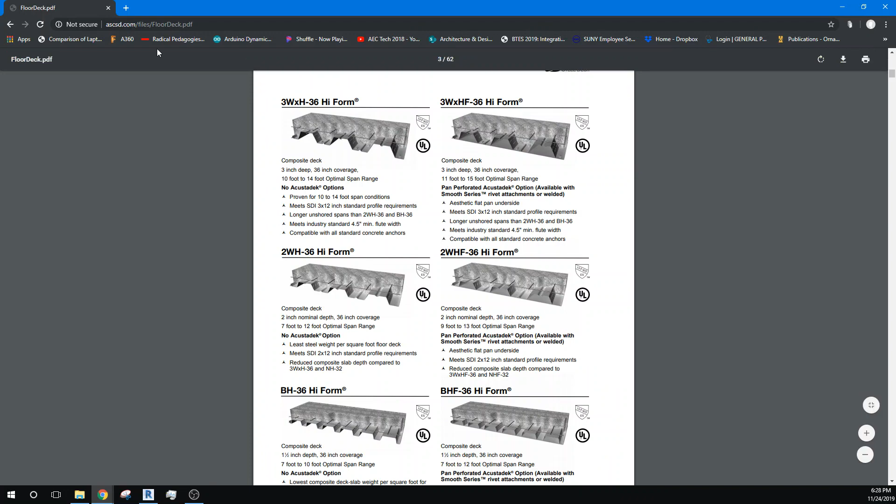I went ahead and looked these up. I Googled for composite floor deck and found a chart system. Here we have even a 2-inch depth floor system, spanning between a 7 and 12-foot range.

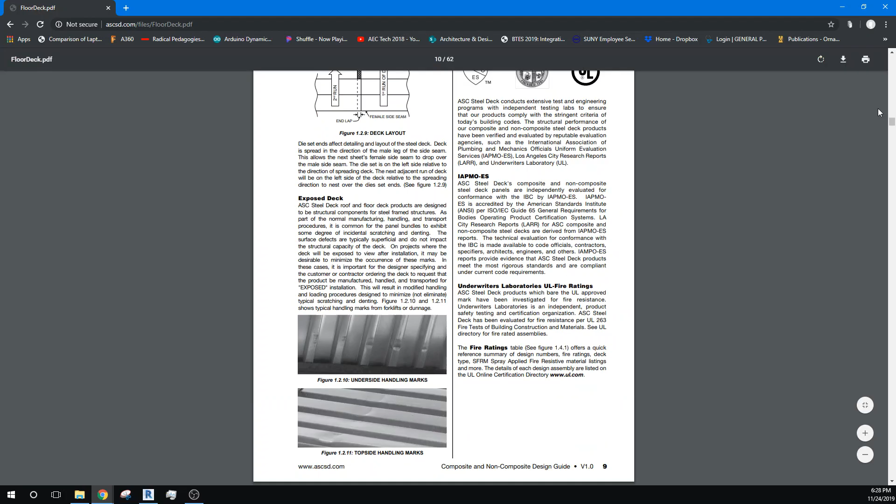Now these aren't the engineering tables, but they're just guidelines about where we can start. I don't know if they go all the way through, but if we go down through these charts we'll get to actual span tables.

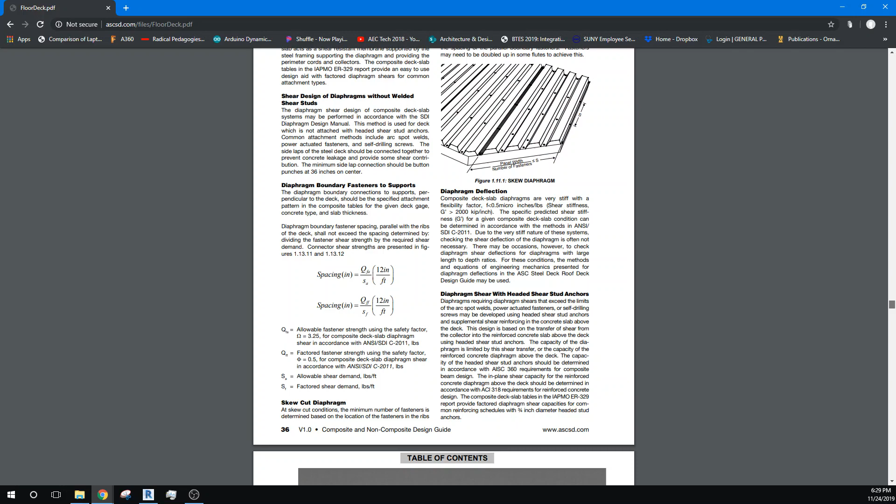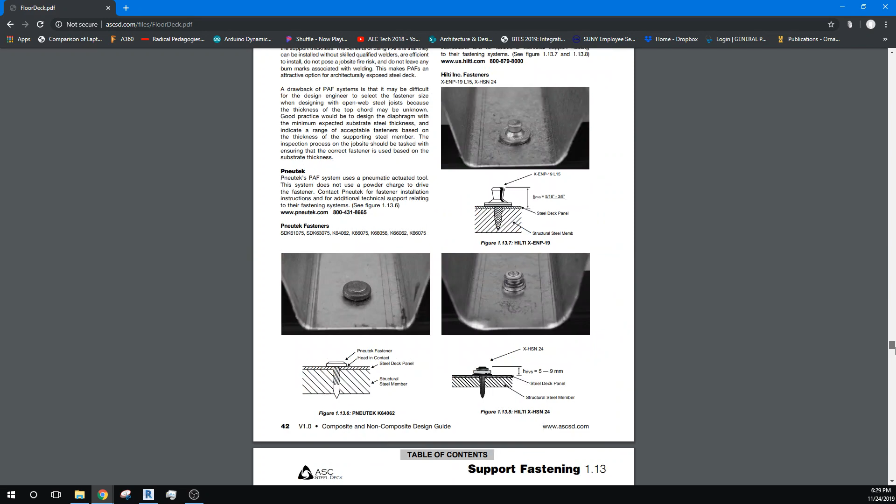They're full of technical descriptions about the relationships of spanning these composite deck systems, fastening them down, and getting data off the charts. Here you can see some fasteners which would fasten it down to the truss system, and then we get into details about the kind of beam systems. In this case they're using wide flanges.

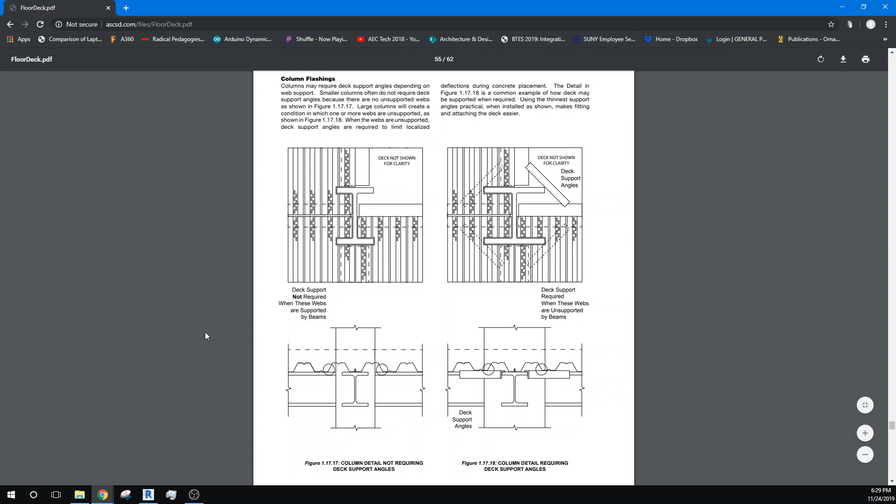And here they're starting to use truss systems. So enough of that—I'm just trying to introduce this idea that we really need to beef up this roof system over what we had originally designed.

I had set these 4 foot apart, but they really don't need to be—they'll span the 8 foot, no problem. So I'm going to go ahead and delete out some of these. Now we have that kind of an 8 foot span.

And I want to now put a roof system on there. We're going to define it as a floor system. It's not liking where we're starting with here, but I'll go to level 2.

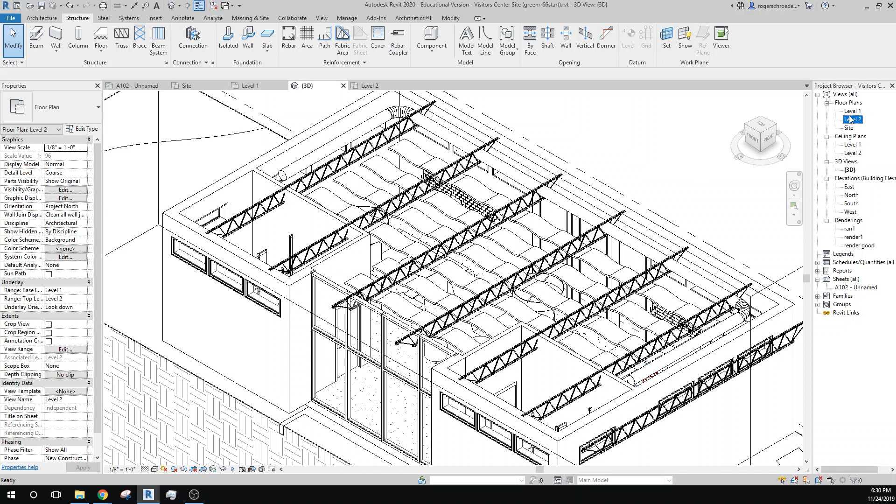If we were to put a floor structural system in, all we have in my document is insulated slab, and I really need another one. So I'm going to open up a new document. Just to tell you why I have such a limited selection—you may have the one in it already—I had purged out a lot of the extra elements when I was working on this document. I'm going to cancel that.

I'm going to go and open up a new file, a new project with the architectural template. All I'm doing is using this to grab a definition of a floor assembly. I'm going to go to structure, and then to floor.

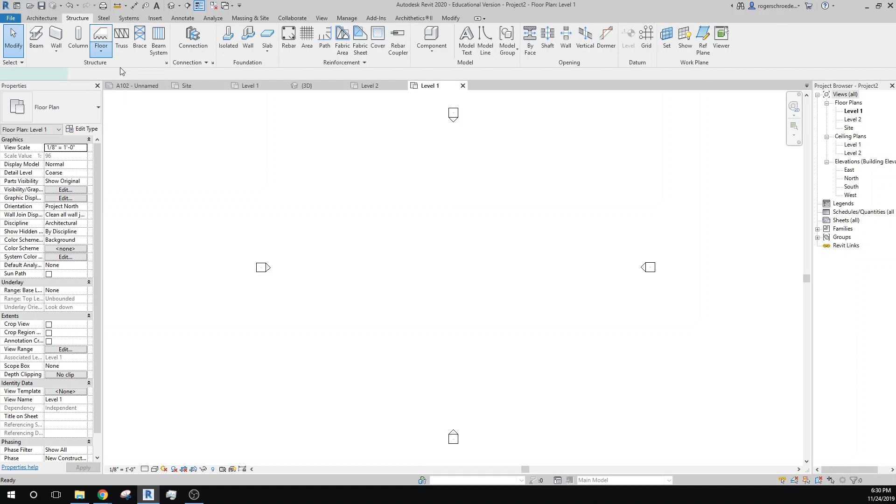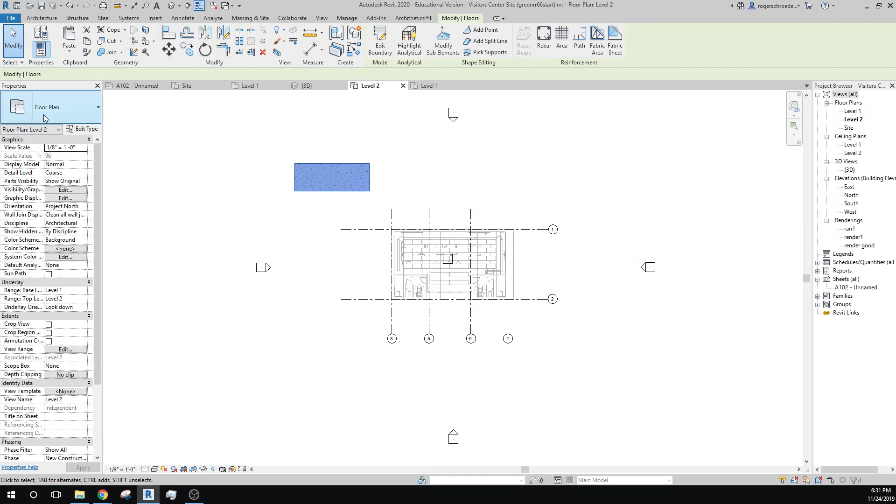It's going to allow me to pick that 3-inch lightweight concrete on a 2-inch metal deck. I'm just going to make a little piece of floor, check it, grab it, copy it, go back to our drawing, and paste it. I don't really care where I paste it—I'm going to end up deleting it. But I now have that assembly, the 3-inch lightweight concrete on the 2-inch metal deck.

So now if I go to create a structural floor system, which I'll do over the building, from the top corner to the bottom corner, I've got it selected for insulated floor slab.

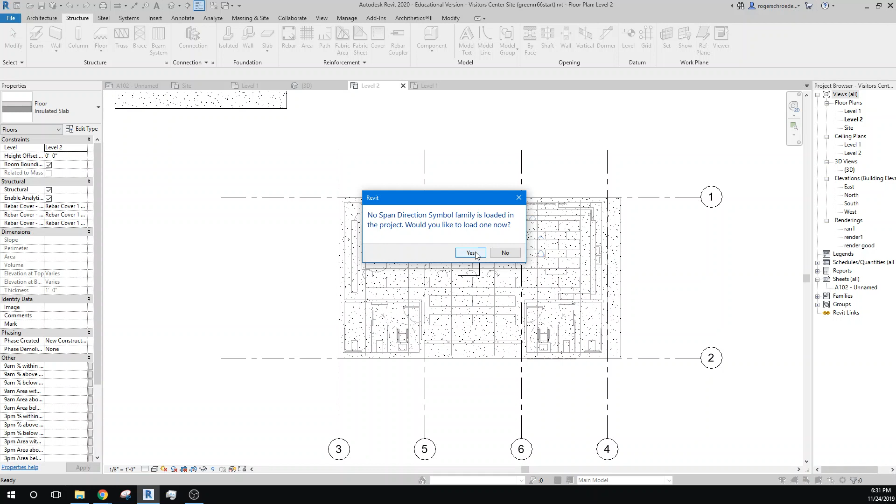Span direction, yes. Whoops, I don't know—would you like to? No. Sorry, I missed some of that dialogue, I was just trying to click through it.

So I'm going to click on that floor again, and this time I'm going to go down and grab our lightweight concrete. Then I can get rid of the original slab I pasted in, and go back to this drawing and just close this out. All I did was use that to grab that component.

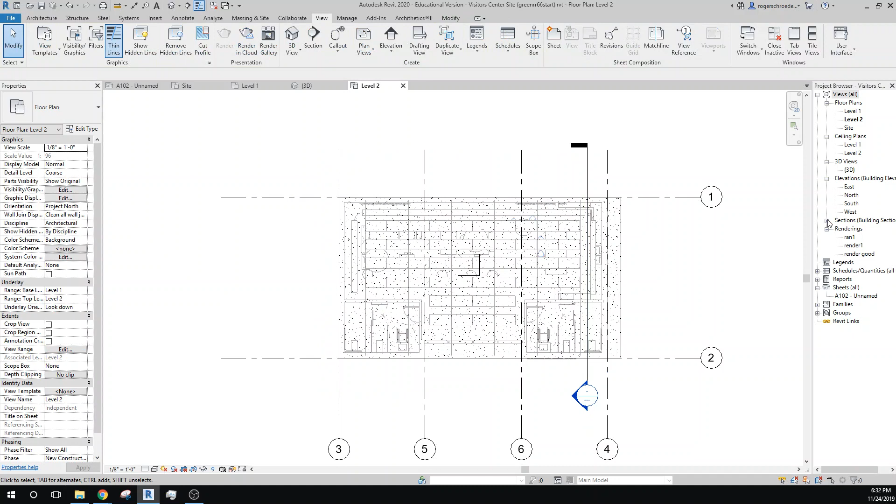Okay, so now if we cut a section through this, I'm going to grab our section tool and pull a section through our slab. We'll go over to sections and pull that section.

What I want to do is take our rendering detail and put it up to high. This button down here, fine, should I say.

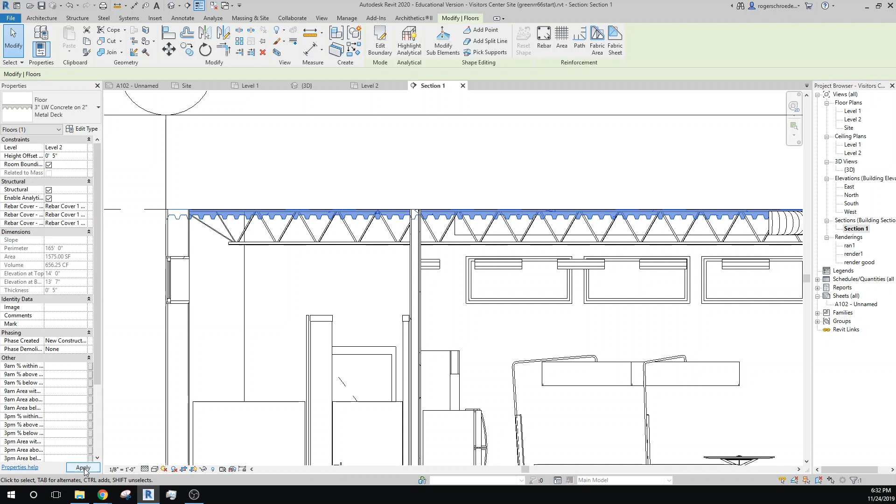You can see in our cross section now we have our composite roof system, and it's sitting down so the top of it is at level 2, but it is 3 inches of concrete on 2 inches of metal deck, so it's 5 inches thick. So I really just want to offset this 5 inches so it sits right on top of the web joist structure that we have.

So now we have a roof assembly, or a roof spanning over our structural elements. We'll go back and look at this in the 3D view and go to wireframe so we can see through it.

All right, so we're really set now to build up our green roof. And when I pick this up again, I'll have some of the information on what makes up a green roof.

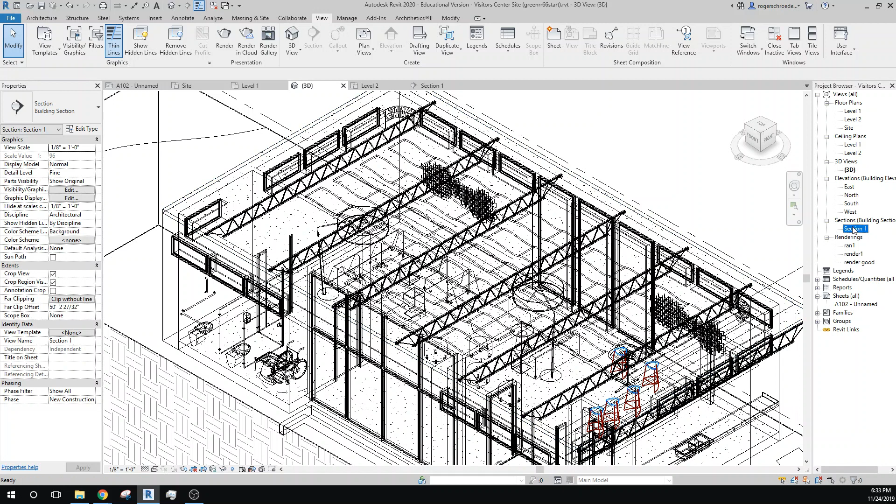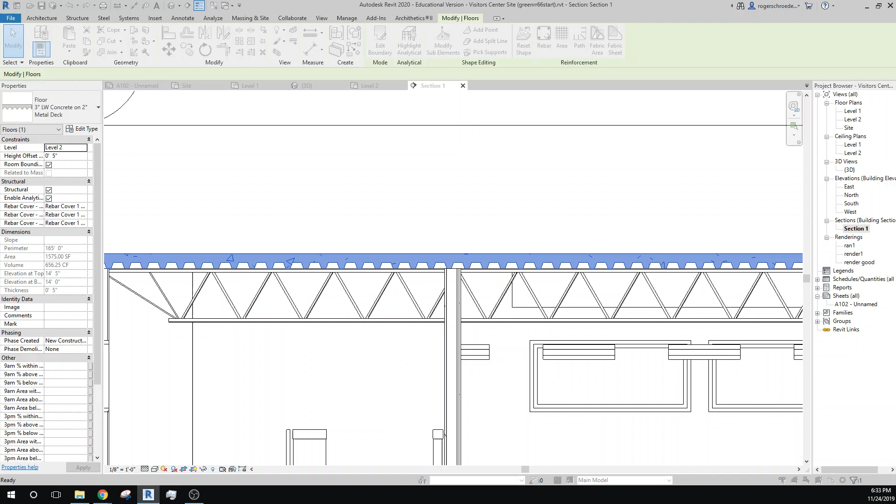So we could go in and actually modify this. I'm going to go ahead and edit that type. My dialog box is off the screen, so I'll drag it on and try to shrink it down a little bit so it fits. And we'll go ahead and duplicate it, and we'll call it insulated.

I'll say 8-inch, with the 3-inch. I'll go OK. Now we have our new defined floor system, which is really a roof system.

Sorry for that. And we have our lightweight concrete. We're going to go ahead and insert an insulation, and I'm going to move that up to the very top. And like I said, they're going to make this 8 inches thick. And we'll go out and we'll look for some rigid insulation.

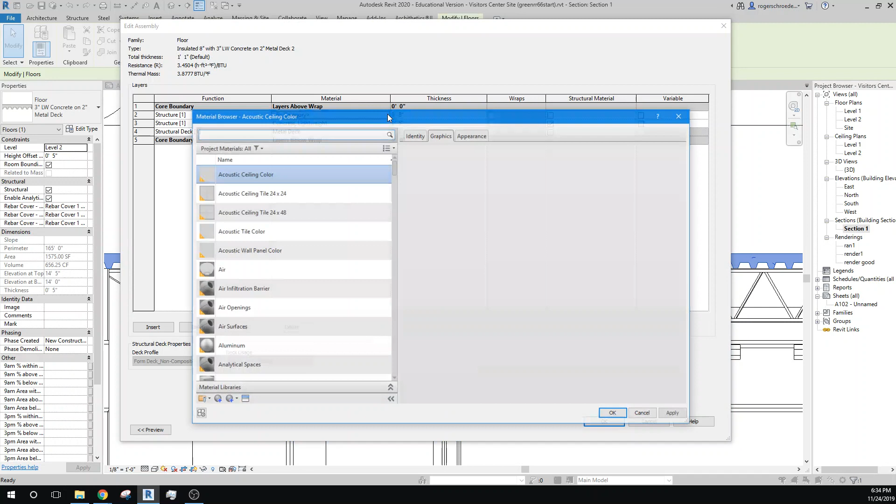Let's see if I have it. Rigid insulation. If not, you'll have to search for it a little bit. And we'll click OK. Now we have a 13-inch assembly, so I'll click OK on that, OK on that.

And now we move the whole thing up another 8 inches. So I need to go up to 13 inches. And we're back to our level.

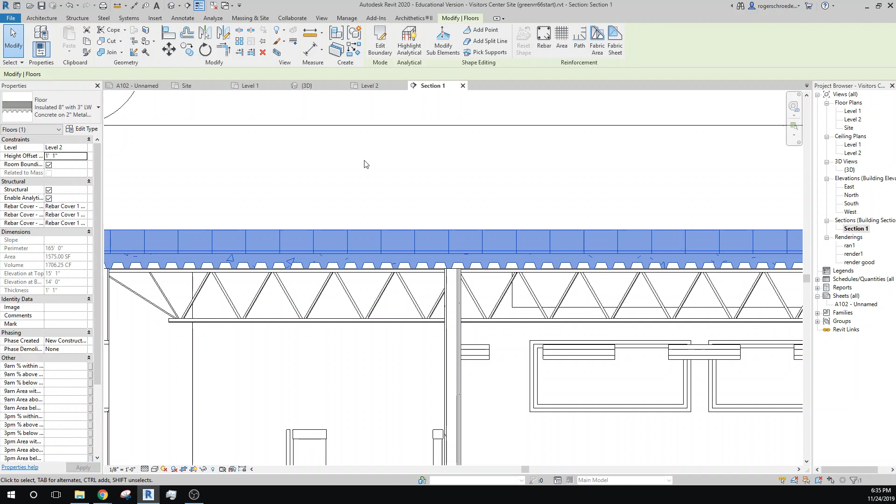So now we're ready, you know, we have a really generously thick kind of insulated covering over that. That might be a bit excessive, should I say. Actually, I'm going to go ahead and change that to 6 inches. That just seems a little bit silly. So let me do that.

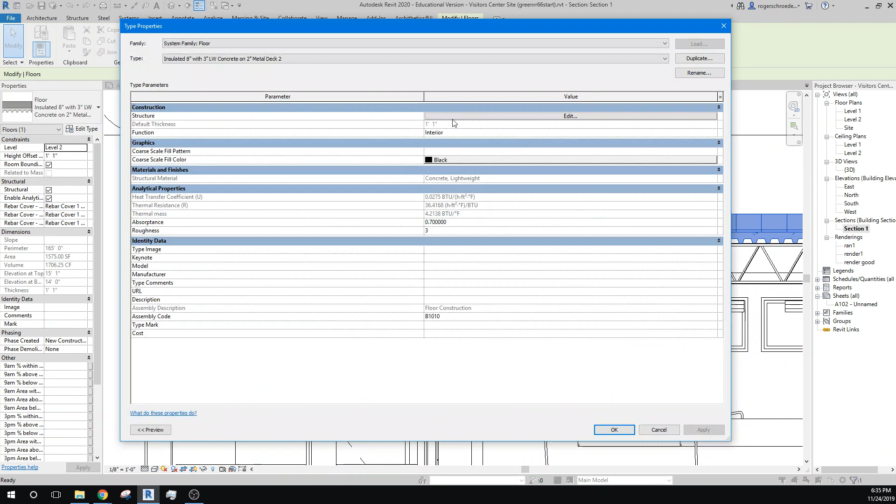Because that will be well insulated since it's going to have soil on top of that in addition. So we'll go down to 6 inches here. And that means we'll need to move this down 2 inches, so we'll be going to 11 inches. And there we are sitting on the top of our framing.

Okay, so the next thing we'll pick up is the construction of the green roofing material on our next clip.